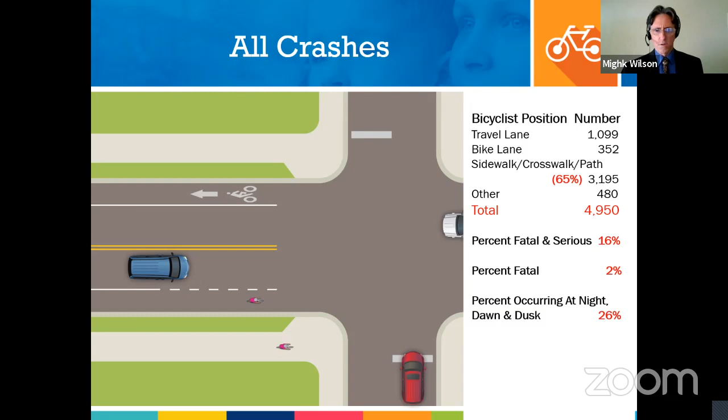The first specific crash type is the overtaking crash, broken down into 3 subtypes. The majority involve a motorist misjudging the passing clearance and sideswiping the cyclist. Another major type is an undetected cyclist riding at night, usually without lights or reflectors. Then there are crashes where the motorist drifts into the path of the cyclist, more of a direct collision. Most of these happen in travel lanes.

These do tend to have a higher potential for fatalities, although most of those fatalities happen on higher speed roads, and a significant portion, about 50%, happen at night.

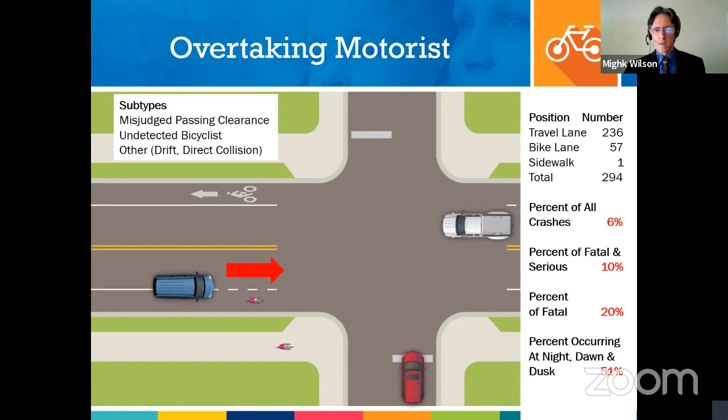The next crash type is called the right hook. Here the motorist is passing the cyclist, or in some cases the bicyclist is passing the motorist, and the motorist makes a right turn across the path of the cyclist. About 5% of crashes overall. These are more likely to occur on sidewalk position rather than travel lane or bike lane, and comparable in fatalities and darkness, although when a large truck is involved, these tend to be very serious crashes.

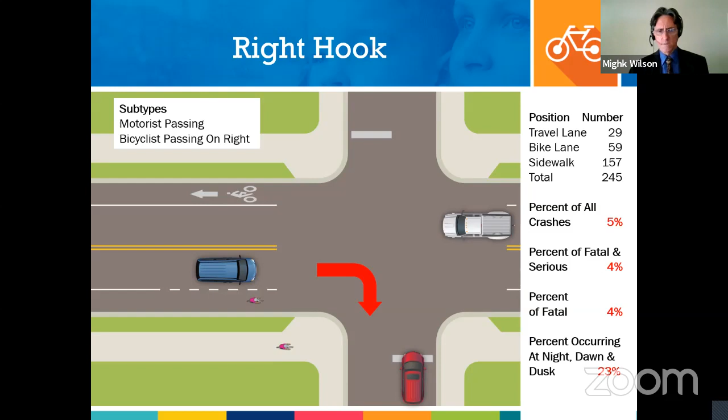The next crash is the left cross, where a motorist makes a left turn in front of an oncoming bicyclist. In some cases, the cyclist is screened by something between the sidewalk and the roadway, or by moving vehicles on the road. In other cases, they are passing stopped vehicles - that would be the queue jump. But in the majority, the bicyclist is not screened in any way.

This is predominantly a sidewalk crash, and also quite a few for travel lane, again similar in the percentage and relative fatalities.

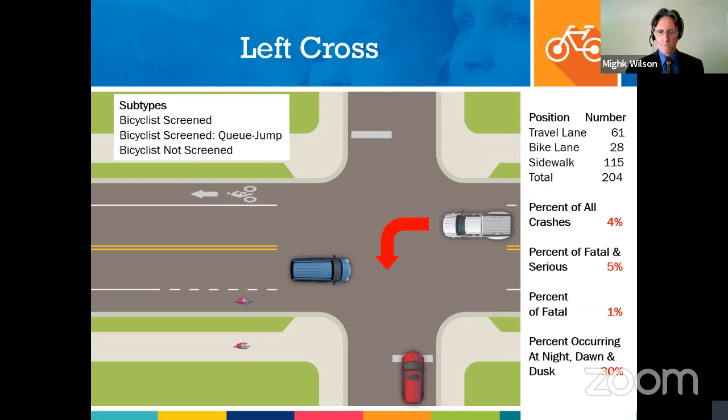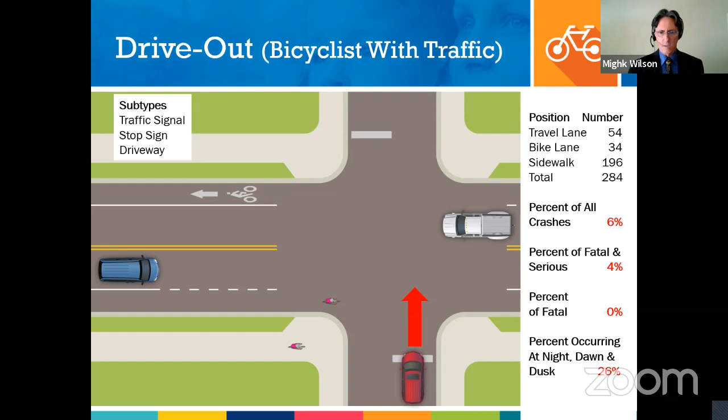Next is the drive out, first looking just at bicyclists going with the flow of traffic. About 6% of crashes overall, spread across intersections with signals or stop signs, as well as drivers coming out of driveways.

When we move to bicyclists going against the flow of traffic, we see a much bigger number - a third of all crashes involve these sidewalk riders going against the flow of traffic. It's important to understand that a bicyclist on a sidewalk has the same rights and duties as a pedestrian, while a bicyclist on the roadway has the same rights and duties as a driver.

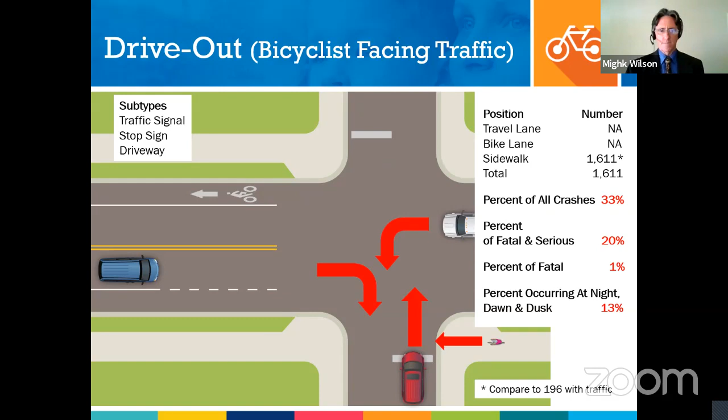So we move to the next crash type, bicyclists facing traffic on the roadway. About 6% of crashes involve that, and they tend to be a bit more severe, probably because of faster bicyclist speeds.

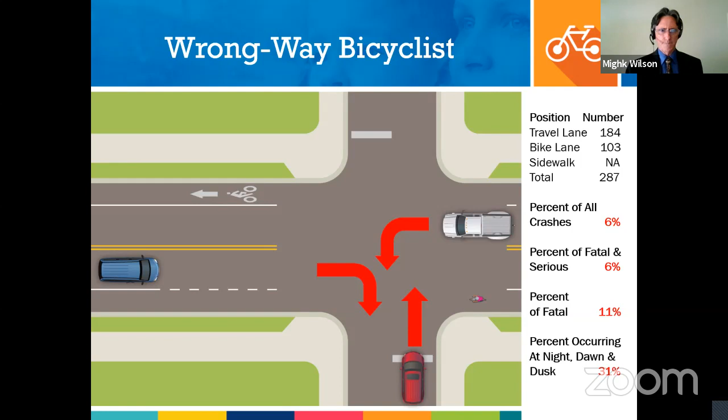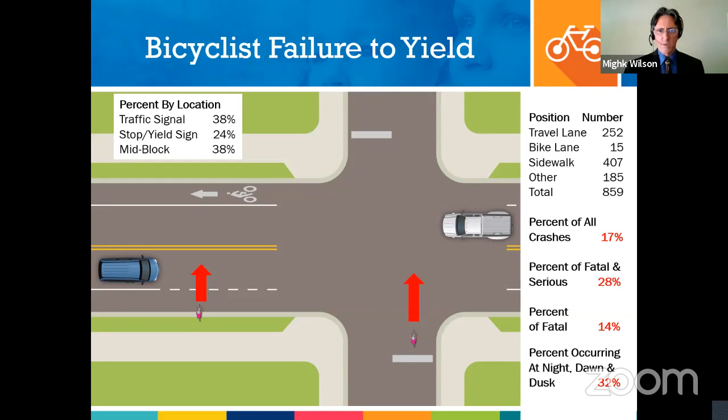I know there's a lot of data in here. We're going to share this presentation with you so that you have it handy as a reference for the July presentation, which gets into the relative risks of being on a sidewalk, a bike lane, or a travel lane.

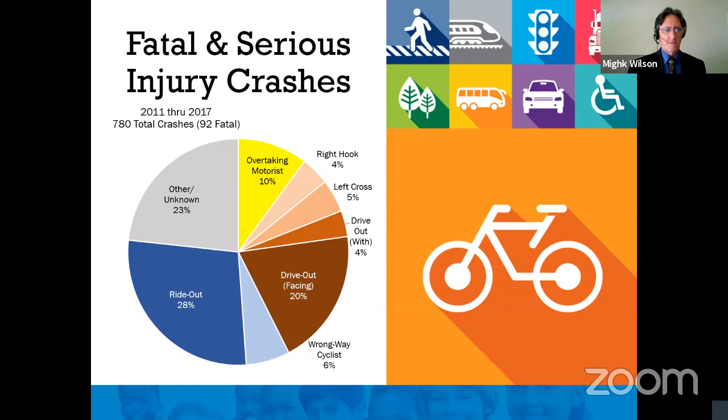As we move up into injury severity, looking at the combination of fatal and serious, we see a greater proportion involve cyclist-caused crashes and a greater proportion involving overtaking motorists. Similarly, when we move up to fatal only, now half of the fatals are bicyclist-caused crashes and about 20% are overtaking motorists.

So next month, or actually it will be in July, I'll be showing you risk analysis based on information from bicyclist counts. We've got the exposure data from sidewalk, bike lane, and travel lane usage, so we'll be able to compare that relative risk based on the number of crashes and by crash type.

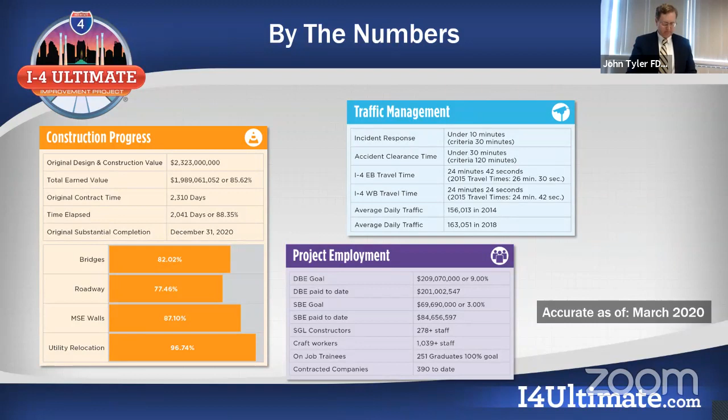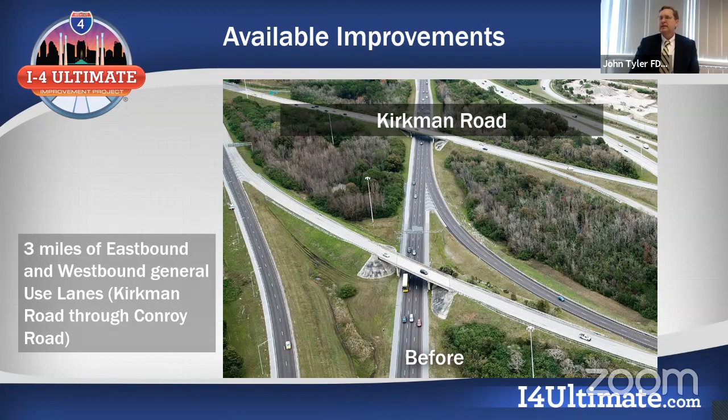Many improvements are already available to the public, and I'm going to go through some of those using a series of before and after slides. Starting at the southern end, this is at the Kirkman Road interchange — this is what it looked like before we started, and this is what it looks like today. We put the interchange into final configuration earlier this year. The old left-hand exit was closed and reopened as a more conventional right-hand exit.

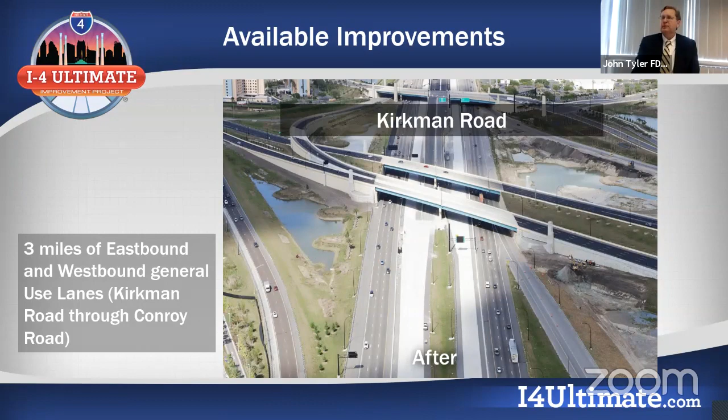Just to the north of the Kirkman Road interchange, we built the Grand National Drive overpass, which opened in August of 2017 on time. This overpass connects area attractions with hotels, restaurants, and other commercial establishments — a very big deal for this area and the economy. It will also serve as an interchange for the managed lanes when we're complete with the project.

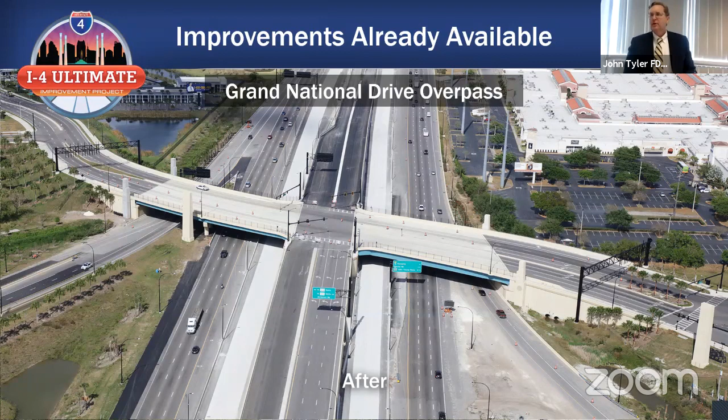Moving to the north end of the corridor up in the Altamonte Springs area, this is what it looked like before construction started, and where we are today. What I'd like to point out is the general use lanes there on the right side of your screen — that's part of the 13 miles of general use lanes already open in the eastbound direction. We're still working on the general use lanes in the westbound direction.

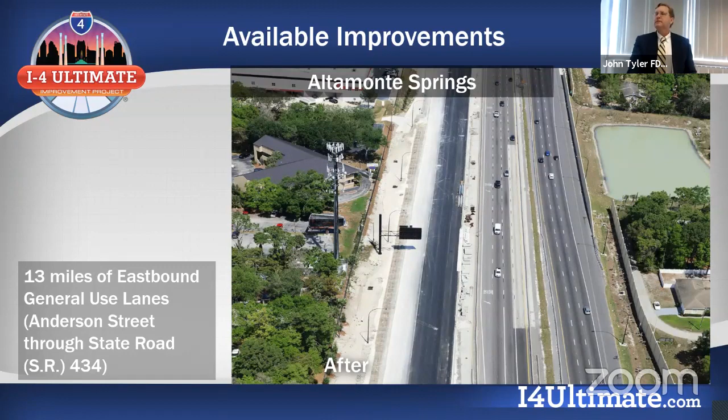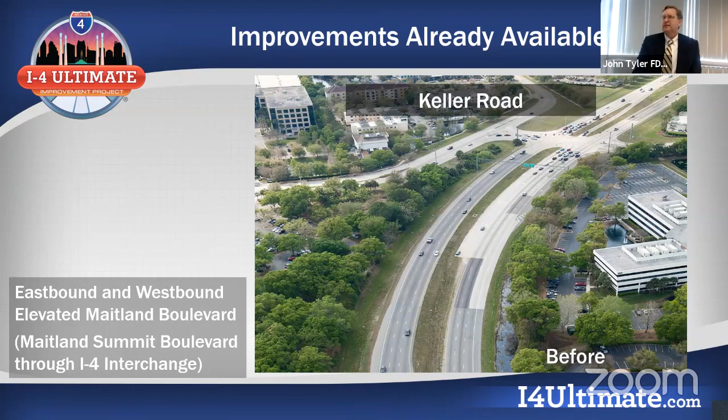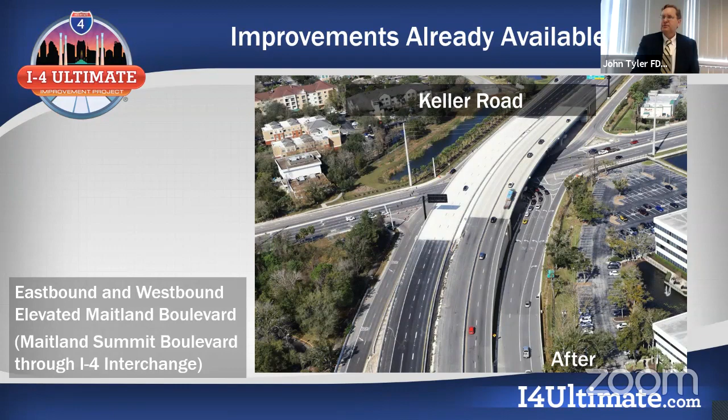Maitland Boulevard has seen some very dramatic improvements since we started construction. The intersections of Keller Road, Maitland Summit, and Lake Destiny have all been reconstructed as grade-separated intersections with through traffic flying over. That, along with the reconstruction of the Maitland Boulevard interchange, means traffic now passes through this area without having to stop for signals.

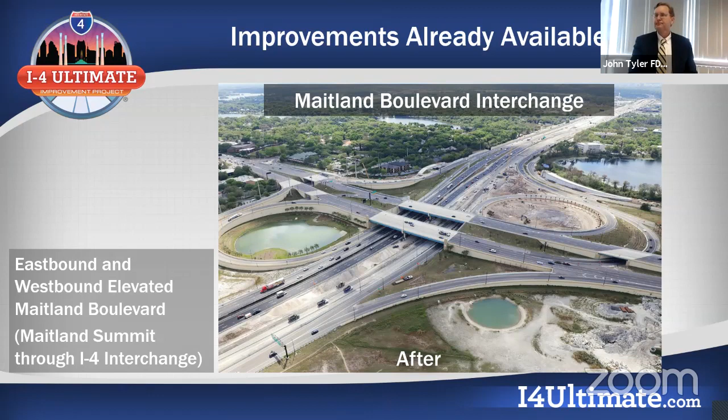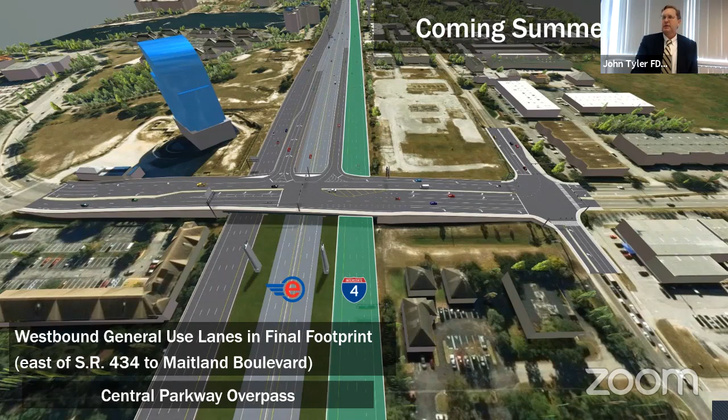Now I'm going to transition to talking about other improvements coming online as we move through the summer. I already mentioned the general use lanes in the eastbound direction in the Altamonte Springs area. The westbound will be coming online as well, as a stretch of the westbound general use lanes in the downtown area from Ivanhoe down to Anderson Street.

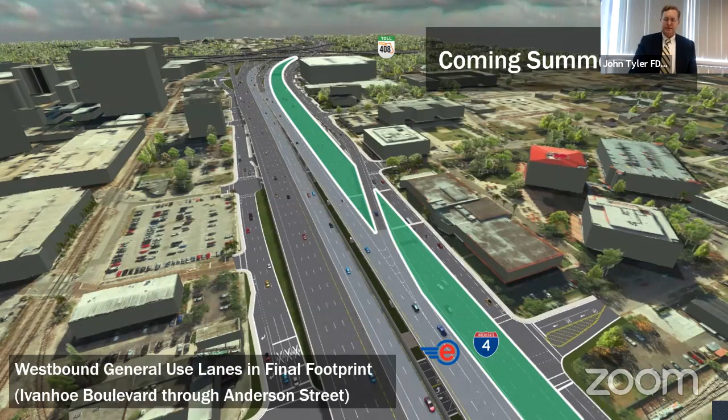And that leads us to the interchange with State Road 408. This is the centerpiece of the project. This interchange handles the majority of the traffic along the corridor. It is the most complicated construction activity, and it is the most costly portion of the project. Roughly 40% of the total project cost is involved in the reconstruction of this interchange, and it will be a complete reconstruction of the original interchange.

You can all remember how that interchange worked before we started the project—a lot of congestion, a lot of backups related to those loop ramps. So it's going to be a significant improvement when the new interchange comes online. With that, we'll also be able to reconnect the Griffin Park apartments to the rest of the Paramore neighborhood. This interchange will represent a huge difference once we're complete, and people are getting very excited about the opportunities that are coming up soon.

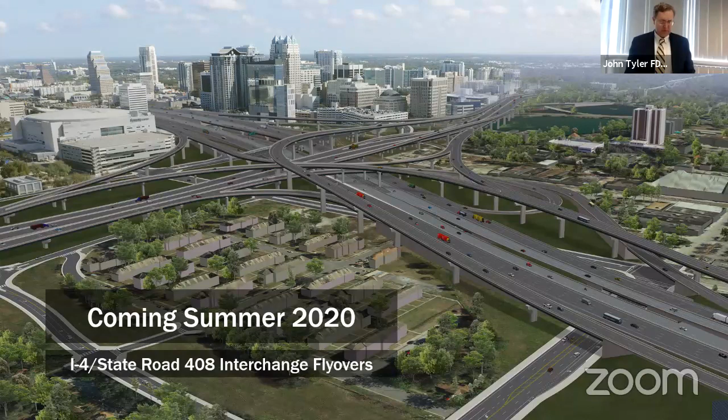So the first ramps that will be opening will be the ramps from I-4, both eastbound and westbound, to the 408, followed later this summer by the ramps from 408 to I-4 westbound.

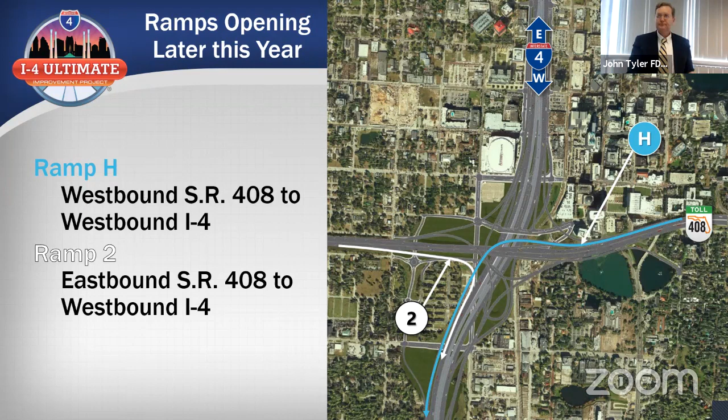In mid-March, FDOT announced an update to our project completion plans. This plan now includes focusing on completion of the general use lanes and the new ramp connections by early 2021, within the original construction duration.

By focusing on the completion of the general use lanes first, the concessionaire will have an additional year to complete the managed lanes. FDOT believes that this is the best plan to serve the nearly 200,000 daily drivers who depend on I-4. Motorists can expect an upgraded I-4 main line, complete with enhanced safety features including full-width travel lanes, outside shoulders, and new ramp connections at 15 interchanges in early 2021. That's less than a year away.

With this updated plan, FDOT and the concessionaire settled claims on the project. FDOT agreed to an additional compensation of $125 million to settle claims for unforeseen conditions and issues outside of the control of the concessionaire. Some of these issues included drilled shaft construction difficulties in the downtown area due to unforeseen ground conditions, additional FDOT-required safety reviews prior to opening a bridge over State Road 50, as well as delays related to Hurricane Irma. FDOT will utilize available contingency budgets to cover the additional $125 million.

So what does this mean for the project? This strategy enhances safety for both workers and motorists. Drivers will receive a more reassuring and reliable driving experience sooner, with fewer traffic disruptions and temporary lane shifts. Construction of the managed lanes within the median will minimize daily disruptions and provide space for crews to work away from live traffic. This plan will also allow the project team to maximize their resources.

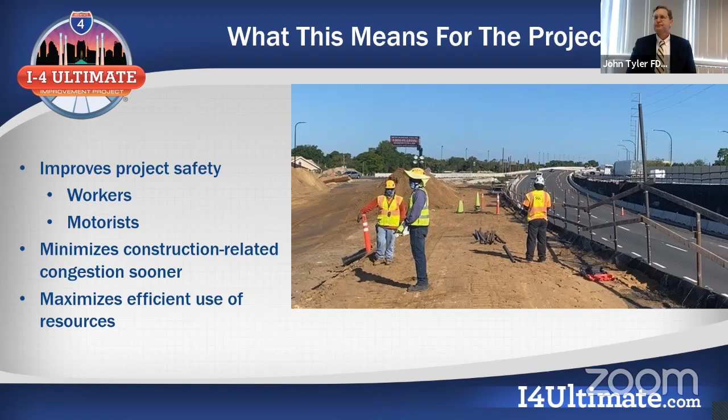So what does this plan mean for Central Florida? It means that the general use lanes will be completed on time. And what are the general use lanes? They are the non-tolled lanes that will handle the majority of the daily traffic even after the managed lanes are completed. They are depicted here between the yellow arrows. Also included with the general use lanes are the new entrance and exit ramps to the project's 15 interchanges. An auxiliary lane connecting to one of those ramps is shown there on the far right.

The new general use lanes and interchange ramps will be superior to the interstate before construction began. I-4 was built in the 1960s with different traffic volumes, vehicle types, and average speeds. The new general use lanes will be designed to current standards. Improvements to curves, sight lines, ramp exits, and entrances mean that even a rebuilt I-4 general use lane will be a significant improvement for drivers. And we believe that we're already seeing that with the 13 miles of general use lanes in the eastbound direction and how that's impacting and improving travel time through the corridor.

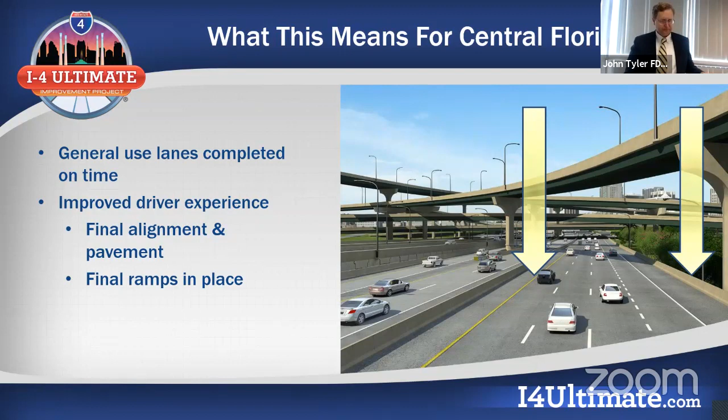So what does this mean for MetroPlan Orlando and FDOT's local partners? It means certainty about the future. The updated completion schedule gives meaningful improvements by the end of this year, with knowledge that the managed lanes will follow a year later. The reported claims and delays have been resolved, and the additional compensation will come from available contingency budgets. For the remainder of the project, the contractor will still be held to the same performance standards, and the commitments that the contractor made will be fulfilled—landscaping, aesthetic features, new pedestrian features throughout the corridor, as well as a modernized I-4—with all of these improvements being delivered in a time frame dramatically shorter than the 20+ years it would have taken with traditional funding and contracting mechanisms.

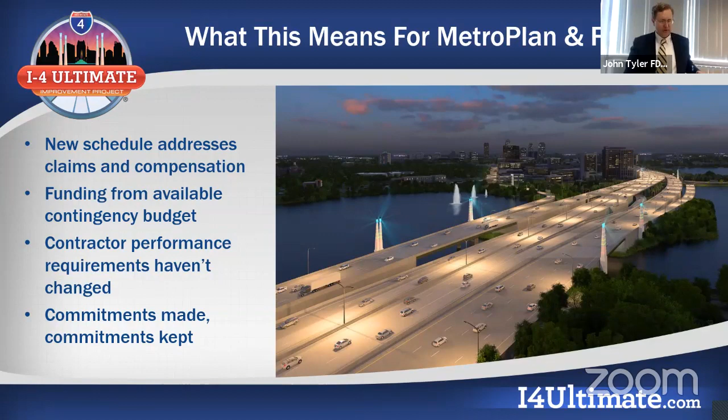This brings me to the final portion of my presentation. On Saturday, April 11th, Governor DeSantis announced that FDOT would be accelerating significant portions of the I-4 Ultimate project. Specifically, FDOT plans to complete segments of the westbound general use lanes and their connection to the 408 interchange by early summer 2020, which is 1 to 2 months earlier than planned.

We will accomplish this by taking advantage of reduced traffic volumes to close ramps and through lanes on I-4, and even some intersecting roadways, to accelerate construction activities. Traffic volumes are starting to increase, but they have been as low as 50% of what we saw before coronavirus. During this time frame, engineers have been monitoring traffic conditions and detour routes and making adjustments to those plans as necessary.

Some of the initial operations that we announced with this plan include closing of the I-4 westbound on-ramp from State Road 434. This has been under construction now and closed for about a month, and we've got about another 2 weeks to go with this operation.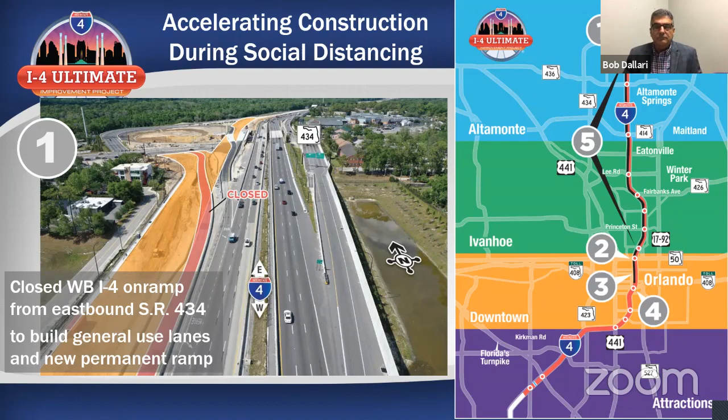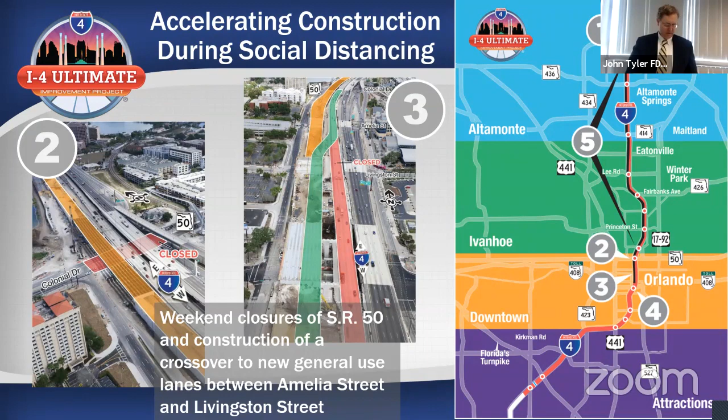Other operations include weekend closures of State Road 50 to facilitate bridge construction on I-4, as well as a westbound general use lane shift between Amelia and Livingston Street—that's denoted as operation number 3 on your screen. The objective of these operations is to open up more stretches of the westbound general use lanes and complete the connection to the 408 interchange by Independence Day.

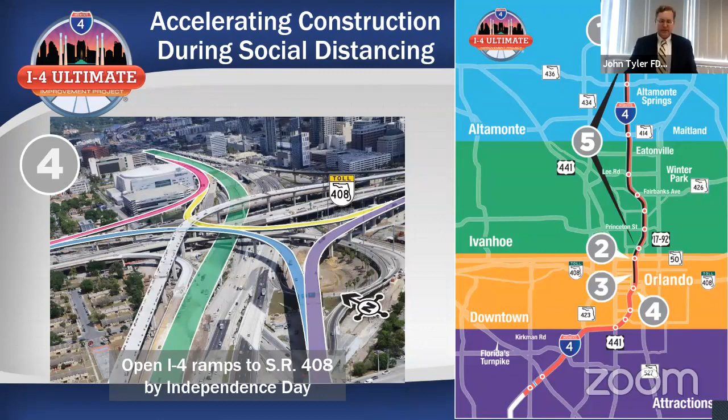We've also been taking advantage of the reduced traffic volumes to do lane closures on the I-4 main line. We've been doing this since the announcement in April. You'll recall earlier this week that FDOT announced some additional operations that are going to be taking place throughout the remainder of this week and through the weekend.

These operations are going to be very impactful to traffic, and we are strongly advising folks to stay away and avoid the area if they can. If they can't, please be aware that alternate routes and detours are going to be necessary to negotiate this area through the weekend. But all of these operations are working in concert over the last month to help us speed up portions of the work so that we can open up additional general use lanes in the westbound direction and the ramps to 408 by Independence Day.

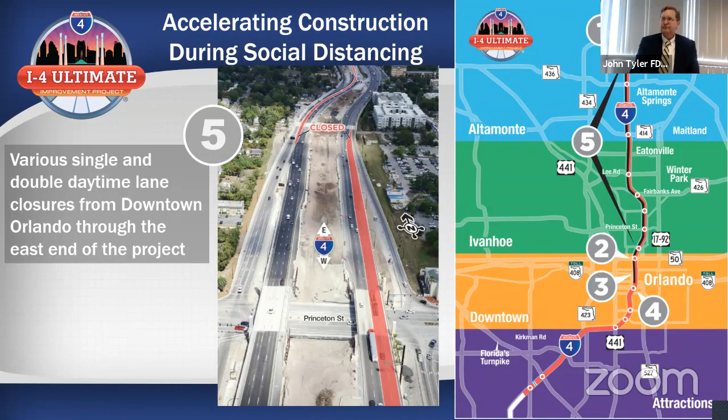So this completes my presentation, and I'm available for any questions that you may have.